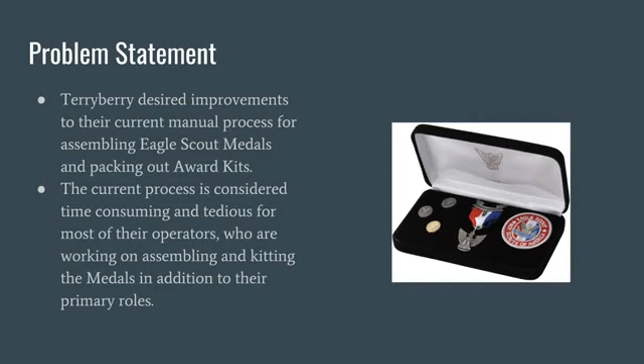As such, they are inexperienced with many of the steps involved, and many of them consider the process to be somewhat time-consuming and tedious. Based on feedback we received from Terryberry in the initial stages of the project and a study of their current process that our team collaborated with them on, it was determined that the most problematic step in the process was the ribbon pinning step.

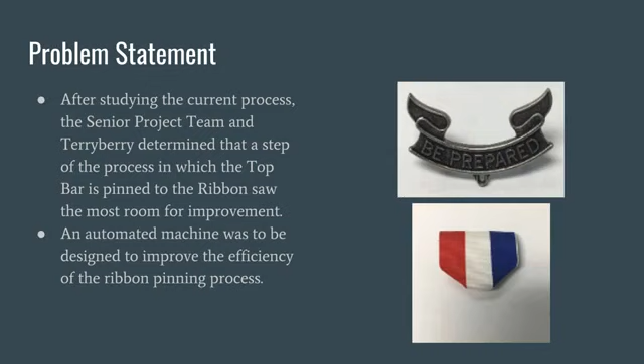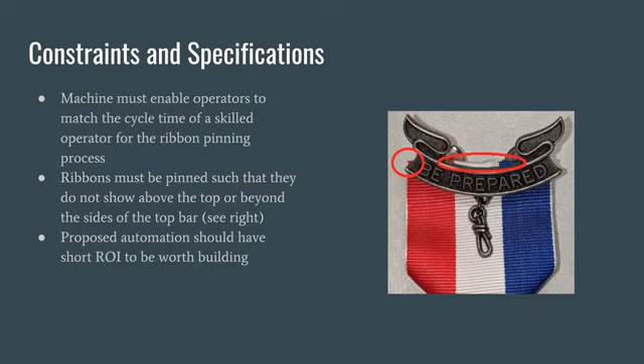Our design was required to have a means of visually indicating the current production condition to the operator. This could be a stack light, a human-machine interface, or any other means that we felt was best suited for the application. In addition, the machine was required to have an emergency stop button and any other features that we felt were required to ensure the safety of the operator. Terryberry set aside a 12-foot by 12-foot floor space within their facility for us to install our machine into, which provided our footprint constraint for the machine. Air and power drops were defined during the initial phase of the project as well.

In order for our machine to be considered successful by Terryberry, the assembly processes that the machine performed would have to have a failure rate of 2% or less during the final runoff testing that was intended to be completed at Terryberry's facility once the machine had been built.

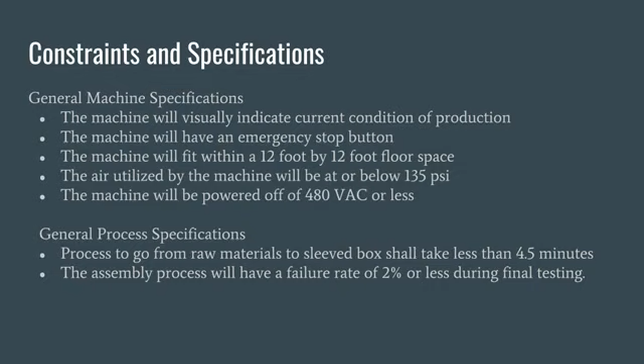The first challenge our team had to overcome in this project was to determine which steps of Terryberry's current process could be improved through automation. In this, we not only had to consider technical challenges related to some of the steps, but also the cost effectiveness for Terryberry to implement these solutions. In order to achieve this, we completed a study of their current assembly process and came up with proposed solutions using automation to several steps of the process. We then used the estimated cost and estimated reduction in cycle time for each of these solutions to conduct a cost-benefit analysis.

Once it was determined that we would focus on the ribbon pinning step of the process, we needed a way to secure the flexible cloth ribbon during the pinning process. Several different methods of doing this were brainstormed during the design phase of the project and then prototyped. Of the physical prototypes made, one of them worked particularly well, and it was decided that that method would be implemented into our design. This will be discussed later on in the presentation during a more technical walkthrough of our design.

Finally, we had a cycle time requirement of 15 seconds per ribbon to top bar assembly in order to match their experienced operator at this step of the assembly. We achieved this by developing a 6-up fixture for both the ribbons and the top bars, and then using a pneumatic cylinder to press the top bars into the ribbons.

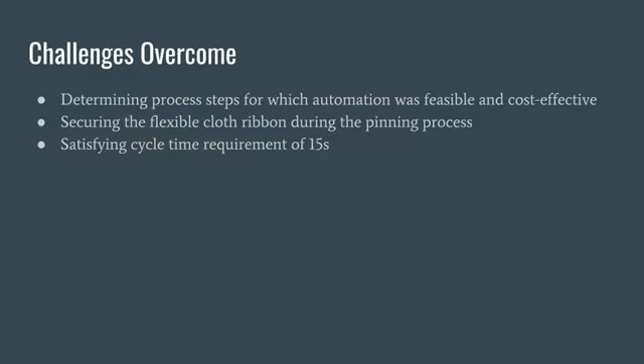I'll now hand this presentation over to Alexander Sicoli, and he will talk about the mechanical design of the machine.

Thanks, Kyle. So looking at the mechanical design a little deeper, we wanted to come up with a streamlined process so that any operator could step in and work this assembly line as efficiently as possible. So what we did is we came up with a workbench style design so that the entire assembly process of the ribbon takes place on just this workbench.

So on the left hand portion of the machine we see the pinning operation occurring, and that's where the operator will load in the ribbon and the top bar, and that will get pinned together and the backings will be put on. After the operator completes that operation, everything moves over to the right hand side where the operator will finish installing the extra rope and eagle charm to complete the operation of the pin design.

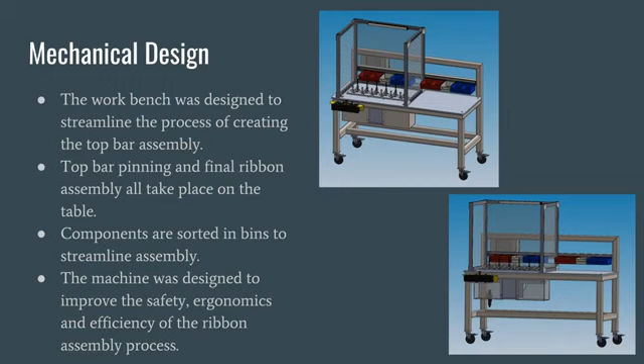So all the components are nicely sorted in the bins above, so each operator knows exactly what components go in on their portion of the workstation, and we wanted to design the machine overall to improve the safety, ergonomics, and efficiency of the ribbon assembly process.

So looking a little closer into the fixture design, this was one of the most challenging parts of this machine, as we said previously in the challenges, was creating a fixture that can handle a flexible ribbon. So what we came up with was a 2-pin design that will grip the ribbon, and then a clamp that will secure the ribbon in place for the pinning operation.

So the way we accomplished this was the operator grabs the vertical handle and pushes that U assembly backwards, which opens up the pins in the hole, and the operator installs the top bar first into a fixture down below on a platen, and then after that the ribbon is slid into that channel, and then the handle is released, releasing the pins back into place, constraining the ribbon. So then the operator pulls that tight and clamps it down.

After that's accomplished, the operator hits the 2-hand touch and the pinning operation takes place, and then once that is done, the clamp can be removed and the pins are exposed to load the backing and the locking bells onto the ribbon and top bar assembly. So this whole process greatly streamlines it and makes it much easier and efficient for the operator.

Instead of doing the whole operation by hand, they have a nice machine press to complete the pressing operation, which greatly saves on ergonomics. We tried to make as many standard parts as possible, so the pins are actually a standard purchase part, so it's not a custom made design, so if those pins get bent during the operation, it's really easy and cheap to swap them out.

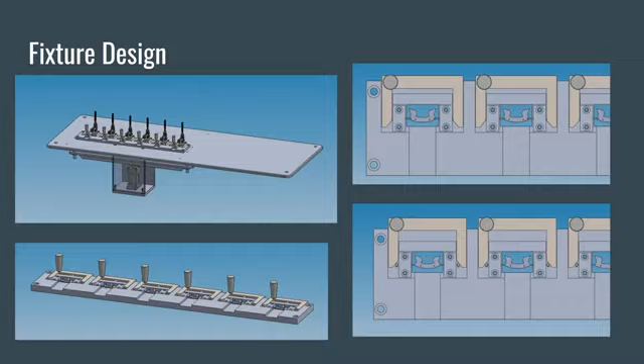Now the platen down below can be seen here. This is where the top bar is loaded into the machine, and this whole platen will raise up and press the top bar into the ribbon, creating the pinning operation. So each one of these fixtures is floating on the subplate, and it's held in by an oversized hole with an oversized washer, and then shim blocks are placed in to precision locate each fixture in the XY direction.

This allows the operator to adjust each fixture individually to make sure it lines up perfectly with the ribbon above for each case, so that we don't have any error and we're within the tolerances needed to properly install the top bar to the ribbon.

So because this is such a precision operation, we wanted to make sure that deflections due to the pressure of the cylinder creating the pinning operation didn't create too big of a deflection, causing us to be off in our direct dimensions. So what we did is we ran an FEA simulation simulating the max force of the cylinder pressing up onto the block, and based on that is how we developed our stiffeners on the bottom, and that created a deflection of 0.007, which we found is well within our tolerance to maintain good top bar placement on the ribbon every single time.

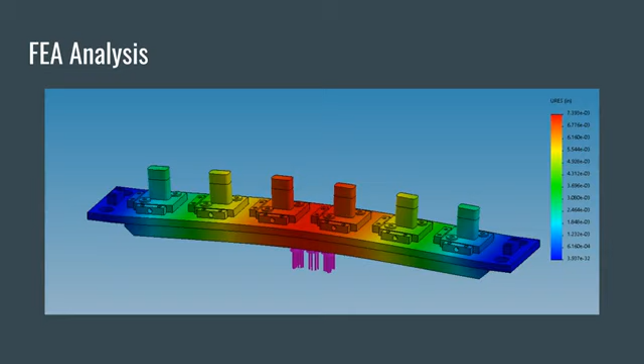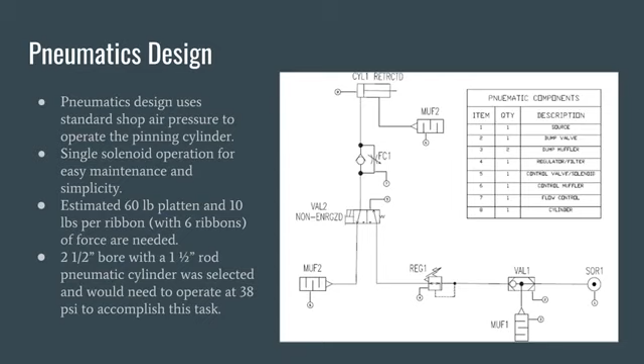And then based on that, we worked with a distributor of cylinders and our own hand calculations to come up with a 2.5-inch bore cylinder with a 1.5-inch rod running at about 38 psi based on what we would regulate the shop air pressure down. And that should give us plenty of force with a good factor of safety to complete our pinning operation.

To control the cylinder, the team decided to use an Allen Bradley Micrologix 820 PLC. We have very few inputs and outputs needed to and from the PLC, so the low cost of the 820 made it an appealing option for us. An emergency stop button is included that will stop the cylinder from actuating whenever it is pressed. We have also included a 2-hand tie down that the operator must hold down on during cylinder actuation. This prevents the operator from sticking their hand into the cylinder well while the cylinder is in motion, where it could potentially get caught by the top bar platen.

A cycle start push button is included that will light up at various points in the process for the operator to press. This is primarily used for fault resets and in between steps of the process to put the controller into a state for the cylinder to cycle. A multicolored dome light is used for annunciating machine status to the operator. Our team considered the idea of using a PanelView HMI for this role, but we decided that there was fairly little information we would actually convey using it, and that a full-blown HMI would be overkill. Instead, flashing or solid lights of various colors from the dome light will be used to indicate various status states such as ready to run, cylinder actuating, or different fault conditions.

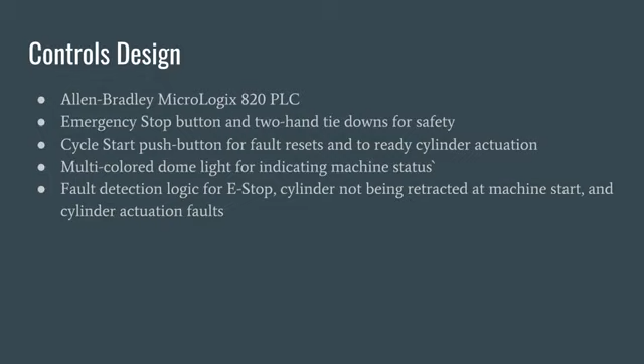The cylinder can detect 3 different fault conditions. Either the e-stop has been pressed, in which case the operator will have to release the e-stop and cycle the cycle start push button. The cylinder not being retracted at machine start, in which case the operator will be required to home the cylinder and then start the machine. Or a cylinder actuation fault, which can be triggered by an excessively long actuation of the cylinder. This allows us to detect either if the extended or retracted prox sensors on the cylinder are faulty, or if the cylinder itself is faulty. Further diagnosis of this is incumbent on the operator.

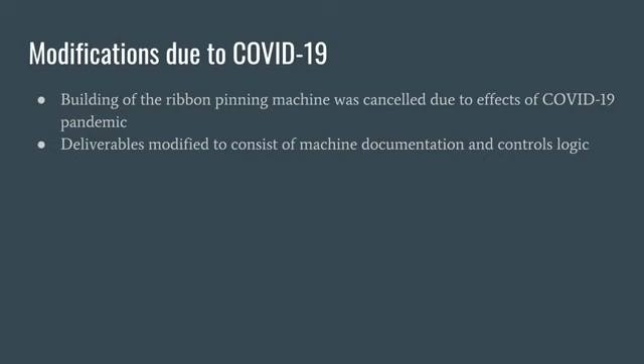Unfortunately, due to the COVID-19 pandemic, the decision was made to cancel the build phase of this project. Instead, the deliverables for this project were limited to the documentation of the ribbon pinning machine and the controls logic for the Micrologix 820 PLC. Our team was highly confident that the machine we proposed to Terryberry would be a viable solution to their issues with the ribbon pinning process.

The greatest technical challenge our team identified during the design phase was going to be securing the cloth ribbon during the pinning process due to its flexibility. However, the success of our prototype of the pin method relieved these concerns going into the design phase. After the completion of the final design review, all parties involved were confident that the machine would work, and everyone was excited to see how well it would work once it had been built prior to COVID causing the cancellation of the build phase.

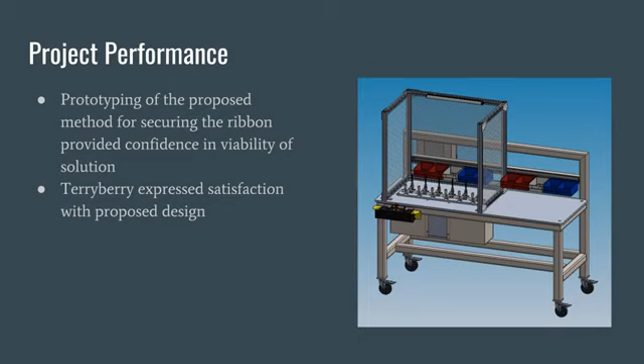There are several people the team would like to thank for their contributions to us completing this project. The first is our primary faculty advisor from Grand Valley, Professor Terry Stevens. He guided us through this project and gave us invaluable insight on the controls side of the project. We also have our secondary faculty advisors from Grand Valley, Dr. Sung-Hwan Ju and Professor Madina Ruzi, who provided additional insight during the design phase of the project to us. Last but not least, we have our sponsor contacts from Terryberry, Dan Young, Tad Evans, and Doug Kutchuk. They were immensely helpful in answering questions and were nice enough to invite us several times out to their facility so that we could gather as much information as we could in order for us to design the best solution possible for them.